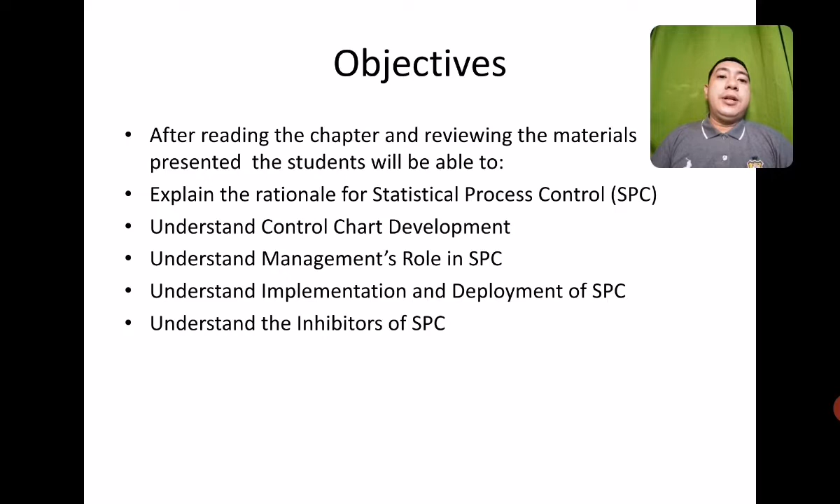What is SPC, by the way? Okay, SPC stands for the statistical process control, and it is a statistical method of separating variation resulting from special causes from variation resulting from natural causes in order to eliminate special causes, to establish and maintain consistency in the process, enabling process improvement. Sa madaling salita, tatagalogin natin, no?

Hiwalay natin yung mga bagay na kaya nating kontrolin at yung mga bagay na it happens in a natural cause, so as we can eliminate those variances and will be consistent with the process, at in management, they're trying to control those unpredictable events, that's risk management and control.

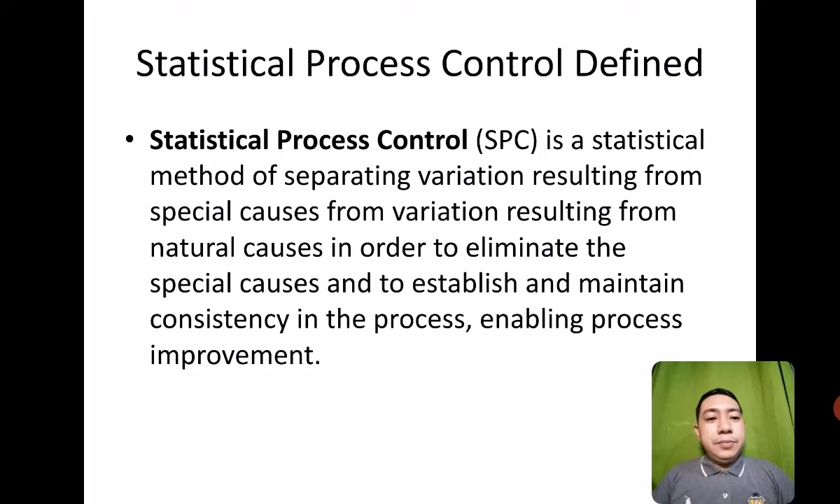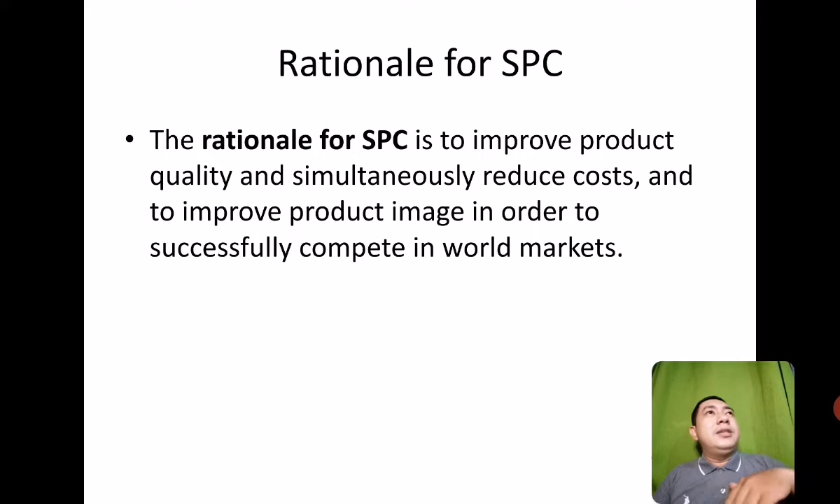Okay, so what's the rationale of this SPC? This is to improve the product quality and simultaneously reduce cost. While you are checking on the process and also monitoring what could happen, or those natural causes, you are able to do the process and reduce cost and to improve the product image in order to successfully compete in the world markets, so you're managing internal and external causes or the variables.

Okay, so what do we mean by that variation in the process? Hindi naman kasi lahat ng proseso ay pare-pareho. But you need to standardize them. 'Di ba? You need to be consistent. You need to be consistent so that we are able to have that standard. Magkaroon tayo ng pare-parehong output.

Just imagine this. If you don't have consistent processes, how do you make a standard output out of it? So you need to control those variances, either coming from natural causes or those derived from the system. So the output of a process that is operating properly can be graphed as a bell-shaped curve. We won't be discussing that figure kasi we'll be focusing on the management aspect of this SPC. The x-axis represents some measurements such as weight or dimension, and the y-axis represents the frequency count of that measurements. In statistics, we have what we call the f of x.

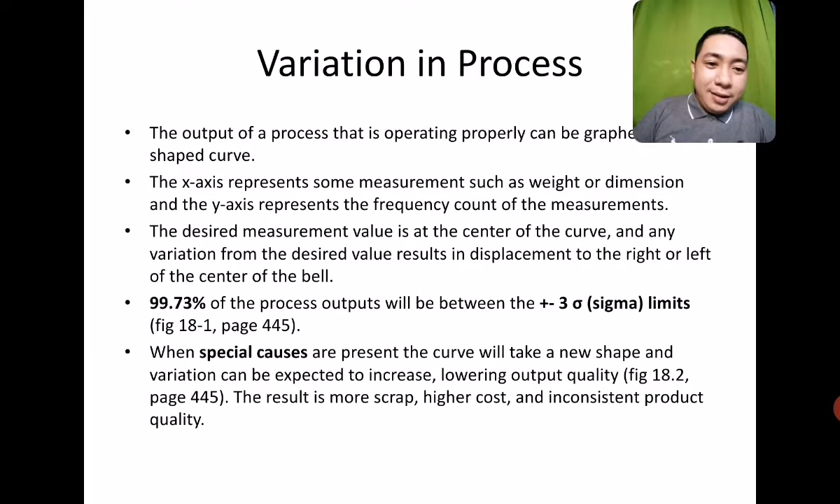to increase. So o nga naman, how do you plan for uncertain events? When you plan for uncertain events, the risk mitigation follows. That means, pag pinaghahandaan mo yung mga bagay na mga pwedeng mangyari, nagiging constant na dahil you're preparing for the unpredictable, and kumbaga you can now predict those what could happen, di ba?

So again, what's the rationale of SPC? Your SPC is aimed at continual improvement, as I've introduced in the lesson. It is usually the improvement of process that yields improved products or services. Before a process is improved, it is necessary to understand it, identify causes that may generate variation, and eliminate them.

'Di ba? As I've been telling you earlier, that's one of the mitigation tools in management para nga maiwasan natin yung further cost or further losses out of unforeseen circumstances. You need to eliminate those variances, and you need to do that process control. And you make it predictable. Yung natural causes pwede mag-bring sa'yo ng ano. But take into consideration, because of your tools, your information that are present, you are able to prepare what could happen along the way, di ba?

So halimbawa may balita, sabi ni Mang Tani, malakas yung bagyo. Of course if you know that information, you are able to prepare and predict what could happen. Parang ganun din sa management. If you're able to know the risks, and of course the effect, or the output or the product, or the effect of that decision, nakakapaghanda ka ng control mechanism for that.

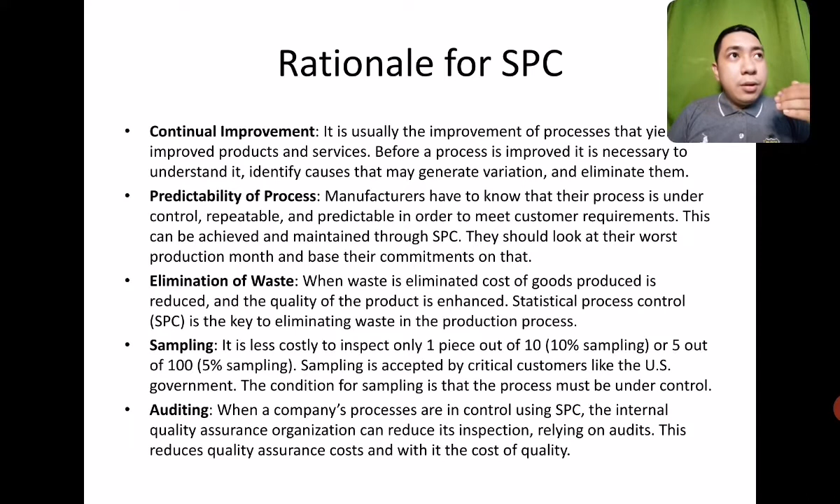You just need to know whether we're following those processes. Okay? So, eto nga, no? As I have been telling you, the focus of this discussion is about the management's role in SPC, statistical processes. So only management can establish the production quality level.

At some point, this is the thing that the management can control, the level of their outputs or their production. Yung hindi natin makontrol dyan, of course, there are things that are still uncertain. Fortuitous, kumbaga sa law, no? These are fortuitous events, but what we can establish is the production quality level, no?

So SPC and the continual improvement that results from it will transcend department lines, making top management involvement necessary. Since this talks about process and quality and the improvement of those processes, the decision making will be starting from the planning of the top management. That's where the involvement of the top management is necessary.

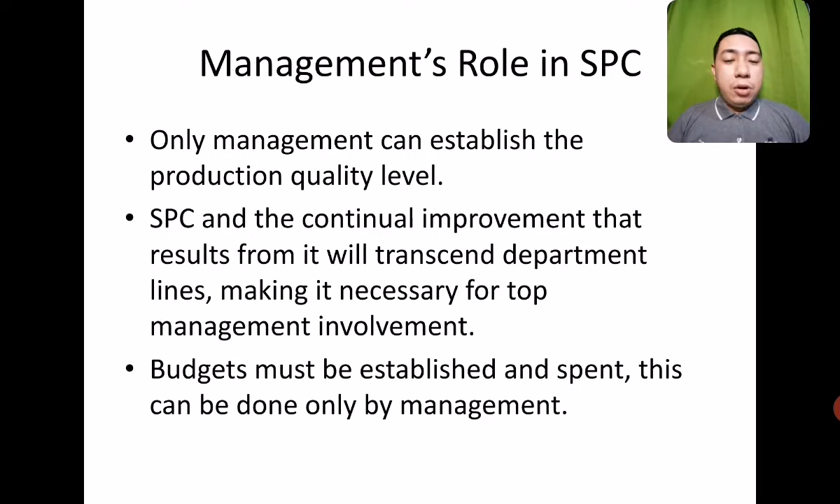And budget must be established and spent. This can only be done by management, of course, in the planning phase, and kasali po ang budget sa planning dahil it talks about the planned financials for the business. These are the involvement of the management in SPC. Again, the end goal is to attain continual improvement and to eliminate costs and wastages.

Okay? So, SPC requires management commitment. SPC and continual improvement represent a new and different way of doing business, and management commitment is absolutely necessary. No one in any organization except the management can mandate such fundamental changes. So a department will be prevented from reaping all the benefits if other departments are working a different agenda.

Siyempre, there will be magkakaroon ng kaguluhan, because you don't believe in one process. In project management, we call this unitary process. There are certain situations in management where they don't talk the same language. They don't talk the same process. That's why they don't understand each other. In this case, the management should make sure all of the departments are talking with the same language and with the same process.

Okay, so let's talk about the authority over processes and production. Operators who use SPC to keep track of their processes must have the authority to stop the production process. Remember, the end goal is to have continual improvement. When you know that there's a problem in the production process, operators have this authority to stop the production process.

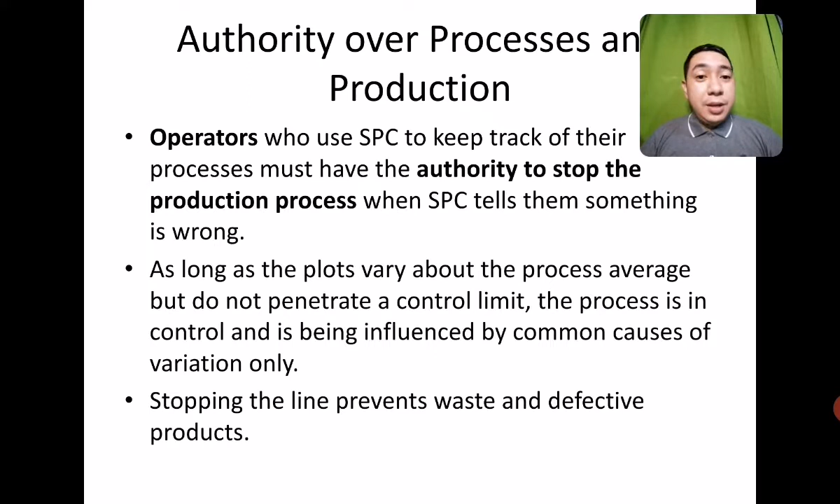As long as the plots vary about the process average but do not penetrate the control limit, the process is in control and is being influenced by common causes of variation. Stopping the line prevents waste and defective products. 'Di ba? If you know there's something wrong with the process and you still push through, that will result in further losses and damages. That will be wastage. And that's a moral sin in finance and of course in quality, na magsasayang ka ng resources natin.

So, how do you implement SPC? There are three phases in the implementation of SPC: preparation, planning, and execution. Let's start first with the preparation phase. First, you need to commit to SPC. Top management must be committed, and it requires spending money, utilizing human resources, changing the culture, hiring employees with new skills, or retaining consultants. Remember, the goal is to achieve continual improvement.

After that commitment from the management, they should form an SPC committee. SPC can be delegated to a cross-functional team tasked to oversee the implementation and execution. This is in the preparation phase. A typical team will be composed of representatives from manufacturing, quality assurance, engineering, finance, and statistics. In a manufacturing plant, the manufacturing member should be the team leader, and the function of the team will be to plan and organize the implementation for its unique application.

And then, of course, when you form your own SPC committee, you need to train that SPC committee. So the training must be done by an expert. The members will then know enough to set objectives, and determine which process should be targeted first. Continued help from the statistics expert remains critical.

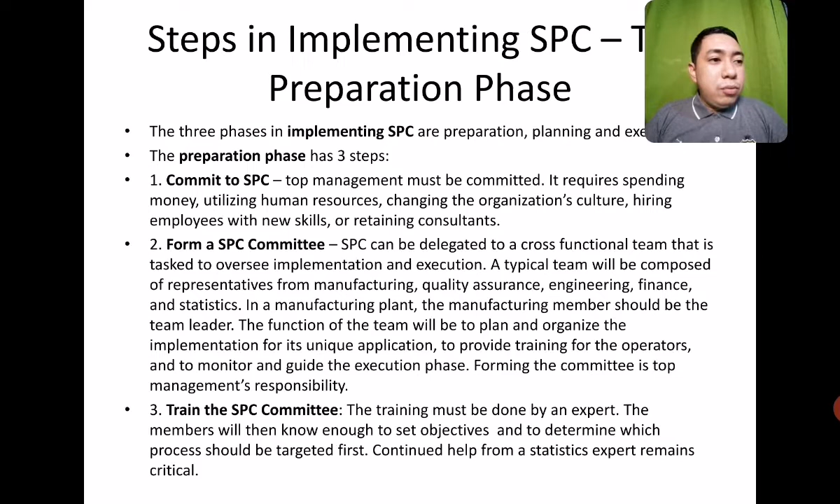By the way, what's the role of statistics in decision making? Of course, when you have that information, that historical data, you can in fact predict, but not 100%. Of course, there will be a margin for error, but you can predict and understand what is happening, di ba?

Then after that preparation phase, you now go to the planning phase. It includes the next five steps. So from that preparation, you should now set SPC objectives. Syempre ang end goal is to have continual improvement, but you should have that set of objectives. So how will you measure success? You'll be checking the balance sheet, the customer feedback, syempre the reduction of scrap, which is one of the rationales of SPC, and lower cost of quality. Objectives may be added, eliminated, changed, or adjusted depending on the management.

Okay, then identify target processes. Select a few processes for pilot implementation with some initial success under its belt, which is proven as part of the processes. So kasali na dito yung screening or filtering of those processes first. Syempre, while you're trying to implement this process, at the very least, meron ng success na process. So you'll be picking your best practices there.

Then number 6, train appropriate operators and teams. Earlier, you needed to form your SPC committee. Now, syempre, you need to train. As mentioned earlier, you need to train the SPC committee, but now at the implementation level, you need to train appropriate operators and teams. The operators and teams will be directly involved in the collection, plotting, and interpretation of SPC data.

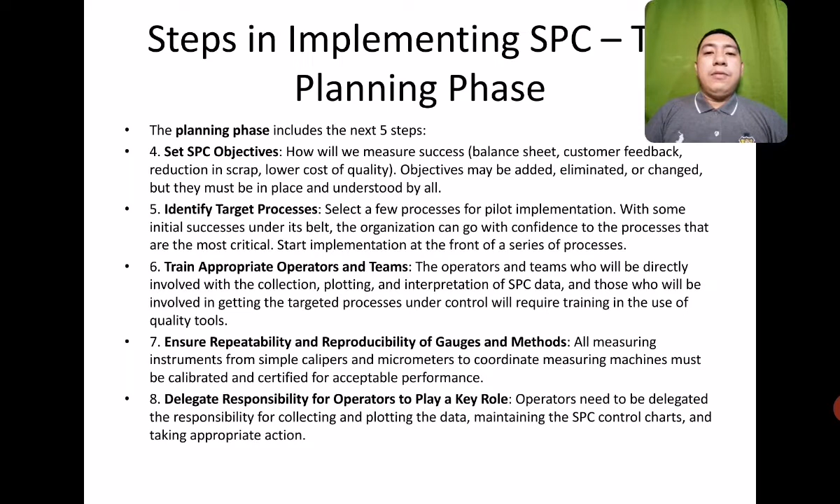And lastly, the execution phase, which has 9 steps. After you've prepared and planned, now you need to execute. Flow charting will reveal process features or factors. So you need to draw the flow of the process, and eliminate the causes of special variation, as I've been discussing earlier. Tanggalin yung variability, kumbaga. Then develop control charts.

The statistics expert or consultant can help develop the appropriate control chart and calculate valid upper and lower limits. Collect and plot SPC data and monitor. As I've been telling you, that's the significance of data, in fact accurate data. These can be a tool to predict or a tool to monitor what is happening.

Then determine process capability. When a process is in control and still not capable of meeting the customer's specification, it's for the management to upgrade the process capability. Then respond to trends and out-of-limits data. There should be a certain level of flexibility with the decisions in the process. And then, syempre, you'll be checking on it. You need to track the SPC data, so the SPC committee and management can see where they should concentrate resources.

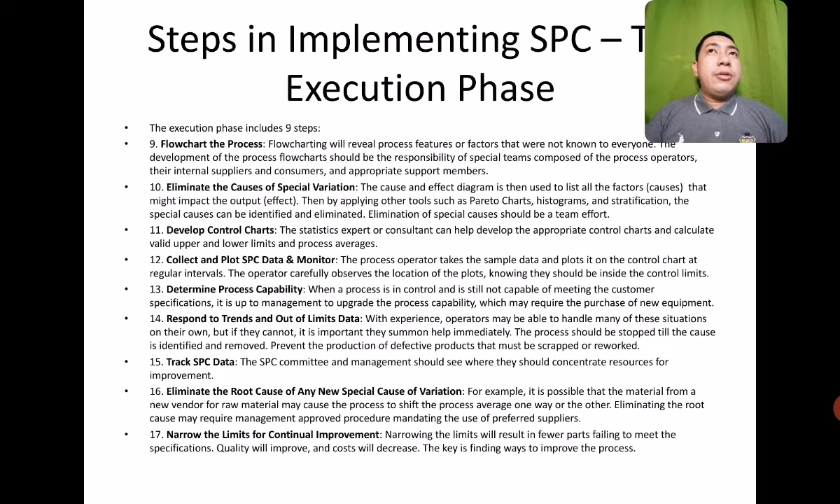Narrowing the limits will result in fewer parts failing. So mas nagiging specific yung goals natin towards continual improvement. Okay? So what inhibits SPC as a tool in quality? The most common inhibitor of SPC is the lack of resources. So how do you do this statistical approach in total quality management?

If you don't have those resources, of course, parang bakit hindi nyo ginawa to? Parang sa research, no? Bakit hindi nyo ginawa to? Sabi ng panel. Nasa isip mo na, oo nga, dapat ginawa ko to, or opo, tama, ginawa po dapat namin. Kaso, no? There are limitations of your resources. Kasi po kulang po kami ng time. Kasi po kulang kami ng resources kaya hindi na po namin nagawa.

But we are taking that into consideration, no? Of course, that's the idea. That inhibits you to have more accurate data and the rationale to continual improvement, 'di ba? How do you really achieve quality outputs and processes if you don't have the means to do that, no? Capability in statistics: many organizations do not have data analytics, no?

This is what I've learned in marketing, for example, no? We should have what we call data banks, no? Data banks of the clients, no? In fact, sa mga apps natin, we are signing those terms and conditions, that they'll be keeping our data and so on and so forth, and then you'll be part of this ganito ganito, that your data is used, no, to understand the behavior of the customers.

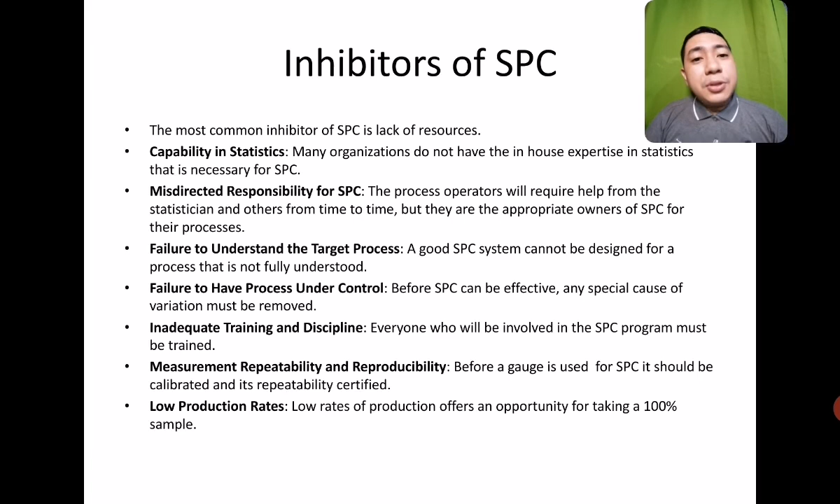How do you study the data if, of course, there will be fewer samples? The same thing with other decision making based on data, na if there are fewer samples that could represent the whole population, syempre parang malabnaw yung result or significance of the study. Okay? Those are the inhibitors of SPC. Okay? And that's it for statistical process control.

Just to sum it up, statistical process control is a method, no? It's a method that aims to have continual improvement. Part of this process is to remove the unpredictability of the process, so magkaroon tayo ng standard, and magkaroon tayo ng specific processes that could really be monitored and audited, no, para magkaroon ng certainty or consistency yung mga outputs natin in quality management. Okay? That's it for today.